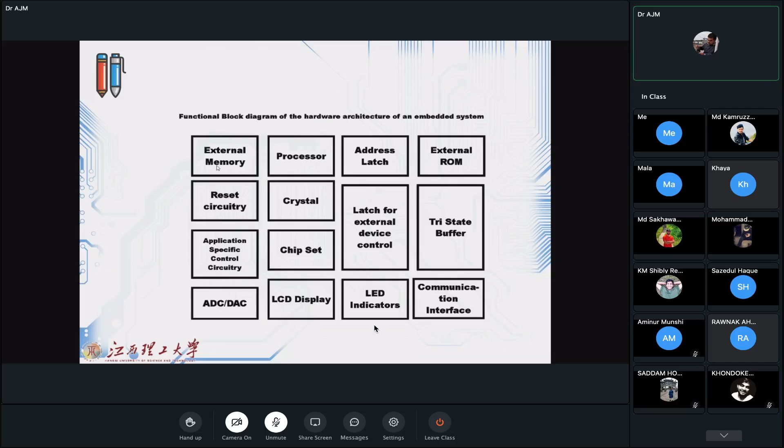Let us review the parts that we have in an embedded system. The first part, if you see the previous picture again, is the processor. What is the role of the processor? Who can tell me? What do you expect from the processor? Please don't read. Let us have a free discussion about our subject. Who can tell me?

So I think the processor takes the data from, let's say, I program the embedded system. So it takes that data, it processes it so that it can be understood by the embedded system, and then translates it and helps the embedded system perform the task. You are right, but just one point is missed. How will the processor understand, how can it conclude?

I think... I'm not sure. That's a good question. Just tell me your idea. I mean, what causes the processor to analyze? Sorry, sir, what did you say? What causes the processor to analyze the data, or in other words, how will the processor analyze the data?

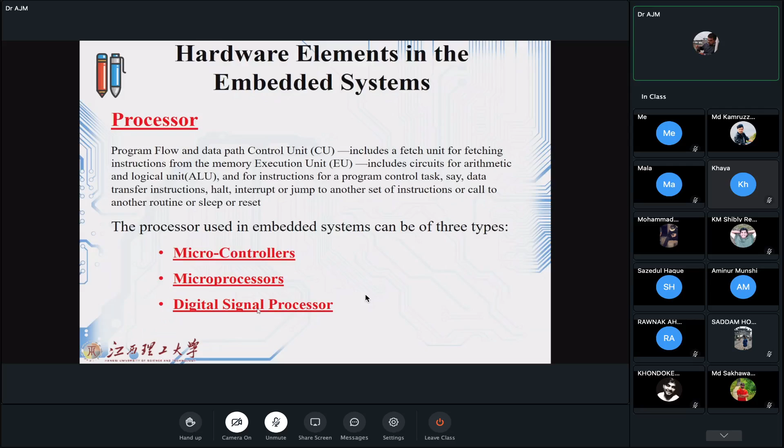The processors used in embedded systems can be categorized in three parts: one could be the microcontroller, one can be the microprocessor, and another can be the digital signal processor or DSP part. Let us review them.

What is a microcontroller? Microcontrollers comprise the main elements of a small computer system on a single chip, and they contain memory, I/O, as well as CPU on the same chip. Here I show something for you: we have CPU, RAM, ROM, and the serial com port. This is the gate from the processor to touch with outside, and also to send or receive something.

And considerably, it will reduce the size, making them ideal for small embedded systems. But it means they are compromised in terms of performance and flexibility. Mainly, the microcontrollers are from the Intel 805X family, something like Motorola 68HCXX. Why do we show it like this?

Because after this, we can have something like 11 or any other model which will come from the company. See this figure: I show some small scale embedded system with 8 to 16-bit microcontroller, medium size with 16-bit microcontroller, and a large size which is about 32. And I name some models.

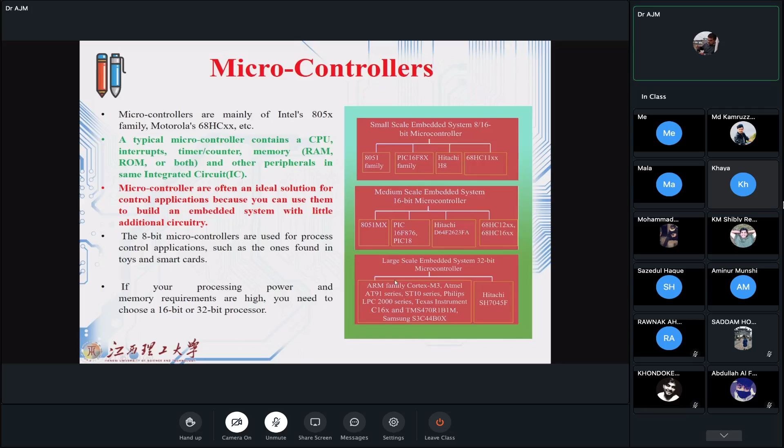But that was the microcontroller. Even we will talk later about it, everything here is packed, it's integrated in one IC. But what about microprocessor? Microprocessor is something like that.

You have one foundation, or you have something like an empty room, but you should go and buy for your room a chair, refrigerator, bedroom, and all. Maybe next lecture I will talk more about this point.

But the main difference between microprocessor and microcontroller is like this: for microcontroller, some amount of RAM, I/O port, timer, and serial COM ports is available. But for microprocessor, you should go and buy it.

I don't know how many of you remember the previous PC that we had 7 years back, suppose Pentium 2 model. When we wanted to buy the computer or PC, we would order the configuration. But what happens nowadays? Nowadays, all configuration, we can say, is fixed, and rarely people order. In some special cases they will do, but in general everything is ready.

You will buy it, you remember or not? Because you used the microprocessor data, and now you are using also again microprocessor. But the thing is that some configuration also becomes fixed for, suppose, new laptops or new computers that you will use.

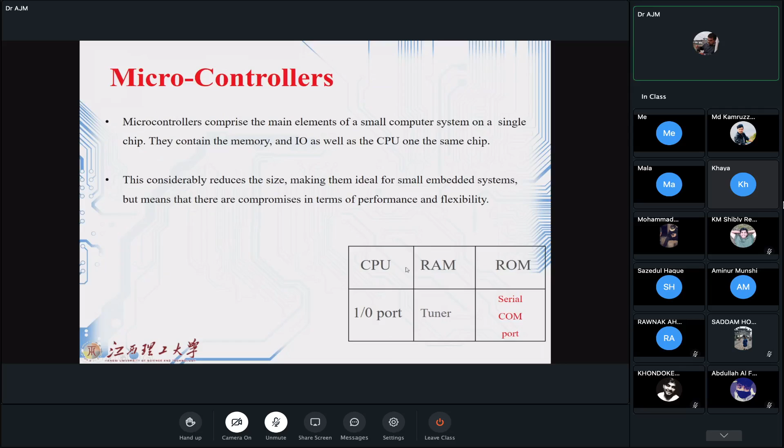Remember this figure and the previous one. Here everything is packed, integrated in one IC, but here you should buy it. This is the main difference between the microprocessor and microcontroller part.

A number of 16-bit and 32-bit microprocessors are available from ARM, Atmel, Motorola, National Semiconductor, and other companies, something like Hitachi, Motorola, and them. In order to develop an embedded system with this processor, you need a great deal of peripheral circuitry. However, microprocessors have higher clock speed and word length, so they are capable of addressing higher memory. These processors are used for high-end applications such as handheld computers and internet access devices.

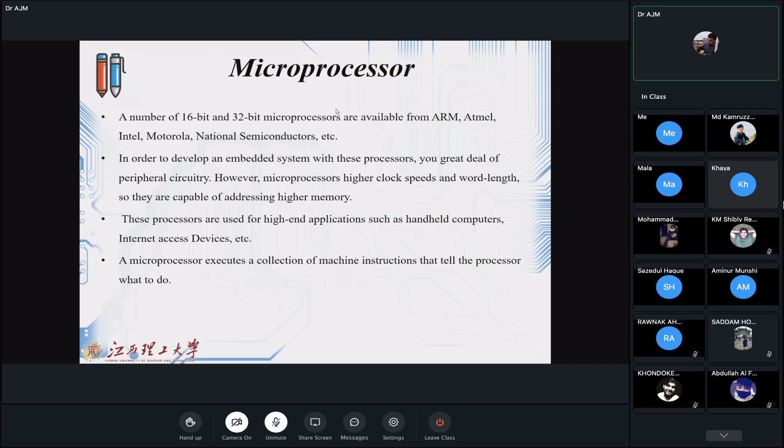Microprocessors execute a collection of machine instructions that tell the processor what to do. See one nice figure which shows the microprocessor's basic concept.

I have CPU, we have some lines to gather the data that we call the data bus, suppose for 16-bit, 32-bit. And this is the address bus, then we need the data bus and control bus. These are the three parts.

You will see that the CPU, memory, and output connect through the data bus to the CPU, meaning the CPU will rule them, the memory and output. See the direction of the arrow? With the data bus, it's something like read and write that you can do with CPU, memory, and output. All of them will share the data, and all of them can be controlled or ruled by the CPU to get the data from memory or get the data from the input-output part.

Here also, suppose we show some external device, with any external device you need one control line and one address line, so that from the CPU it should first read the address and then control it like that. And here from this side, you will see the sensors or transducers, data RAM, instruction program, and boot ROM as the configuration of the microprocessor.

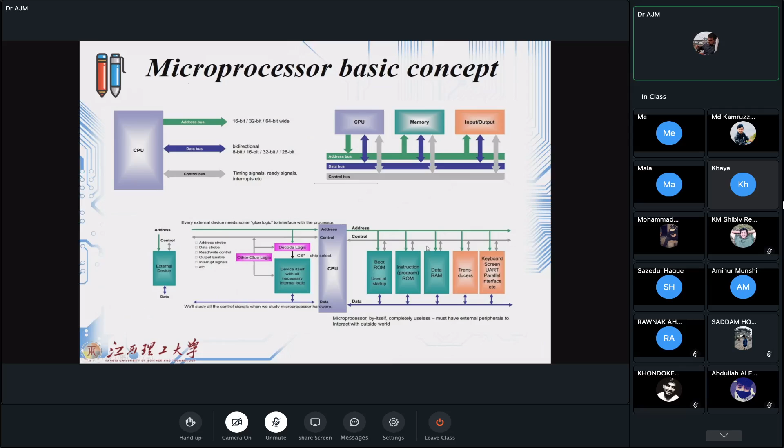Based on the structure, a microprocessor does three basic things. First is using the ALU, or arithmetic logic unit, which allows the microprocessor to perform mathematical operations like addition, subtraction, multiplication, and division. Some modern microprocessors contain complex floating point processors that can perform extremely sophisticated or difficult operations on large floating point numbers also.

Microprocessors can move data from one memory location to another, and also a microprocessor can make a decision and jump to a new set of instructions based on that decision.

From GPP, we can say GPP proper is for general purpose applications, and microcontrollers are for industrial applications. For DSP, that is digital signal processor - these are programmable microprocessors for extensive numerical real-time computation. ASIC is application specific integrated circuit, this is the short form. Mainly they handle algorithm complexity and are implemented in hardware.

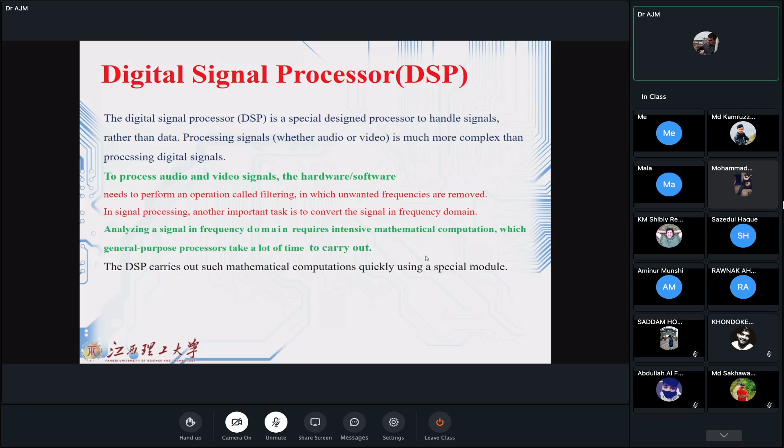That is why we should use the DSP part, and DSP carries out such mathematical and complex parts very easily. Here I bring one figure about the DSP part.

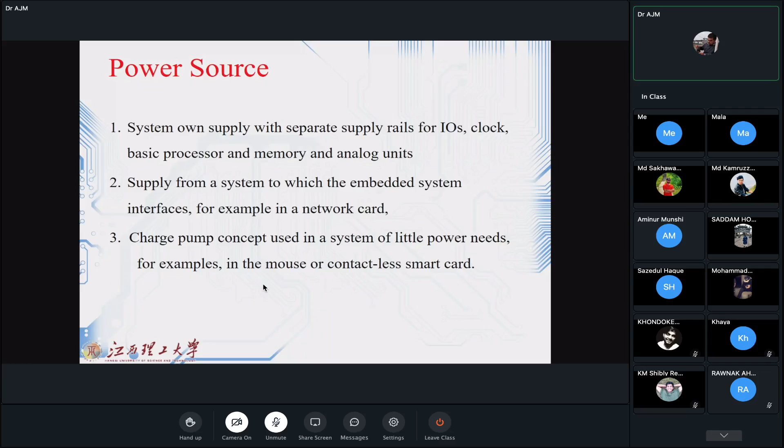The next block is the power source. Any system needs some power to work, and the system is supplied with separate supply rails for IOs, clock, basic processor, memory and analog units. Supply can come from a system to which the embedded system interfaces, for example, in a network card. The charge pump concept is used in a system of little power needs, for example, in a mouse or contactless smart card.

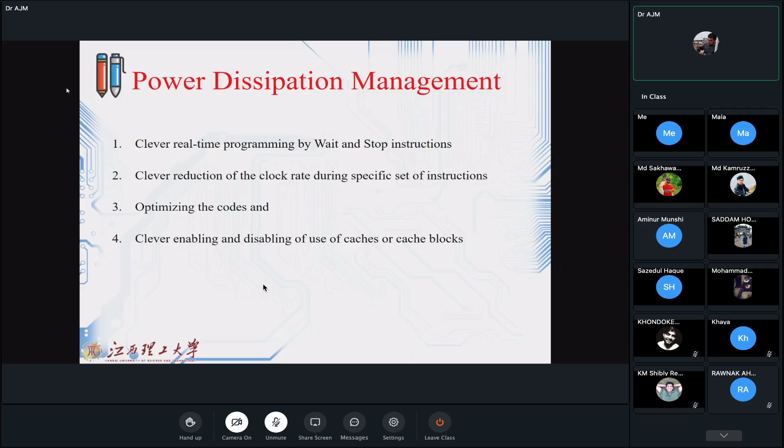Something that we should know in embedded systems, with a very critical role, is the power dissipation management part: real-time programming by wait and stop instructions. We need some clever methods for that: clever reduction of clock rate during a specific set of instructions, optimizing the code, and clever enabling and disabling of use of cache or cache blocks for our embedded system.

The other block, if you remember the first figure that I showed you, is the crystal part, since the CPU needs some clock source. A crystal oscillator will generate the clock for us. The crystal is chosen based on the clock frequency of the processor, and microcontrollers provide it on-chip. But for the microprocessor, you should go and buy a separate crystal for the system. Clock generation circuitry determines the various states of machine signals. We will mainly talk about this machine cycle in the assembly course, how it will act and how it's going to help with programming.

One of the critical parts of any embedded system is the reset circuit. Reset circuits are generally cheap, but they have the main and critical job in any system. Why? Because with them, you can restart and maybe rerun your system. It's generally built in hardware to take care of any unforeseen problem. Sometimes the program does not move, it just stops.

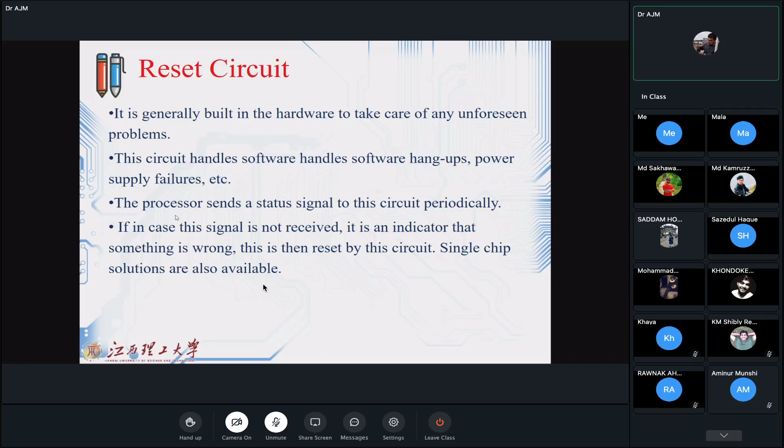You know, any system needs something to watch and see whether the system is working or not. Something like a security system we have in our embedded system, and we call it the watchdog timer. The watchdog timer is something like that. It will check if my program jumps into a loop and is not moving, and it comes and restarts the engine. Okay. Most embedded systems have no provision for resetting the processor. In such a case, a watchdog timer is used.

It's set to a large value and it counts down. It means something like this: it knows that up to the end, my process will take, suppose, some amount of time. If it goes beyond that time, with some ratio or some up and down number, it's going to reset the system or the whole process from the start. And then the process will start again.

When the value reaches zero, the processor resets. And if things are fine, there's no need to reset the processor. The processor resets the watchdog timer to that large value again. We will see this nice part in the Arduino part that we have.

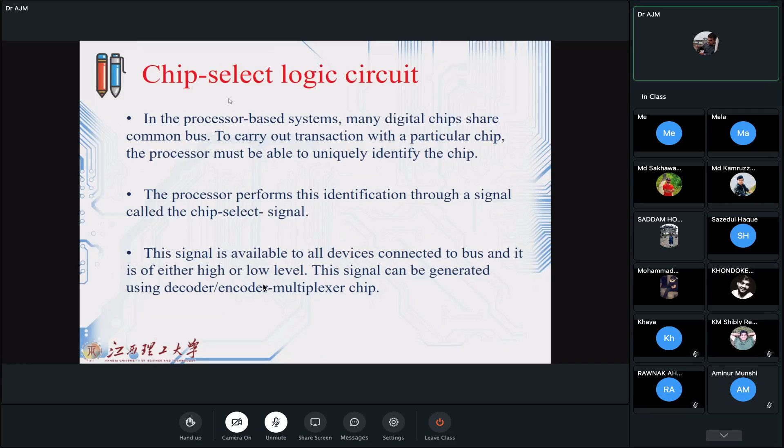This signal can be generated using decoder, encoder, multiplexer chips, and so on. If you remember, in the DSD lecture, in the decoder and encoder part, we had some lines which give the commands, or act as the handle to select which input should come and which should not come. Okay, one of the nice parts of embedded systems is ADC and DAC.

What are they? Really, when we want to work with systems, what we should do is acquire some analog data. Just hold on. I will come back.

What will happen? If you really want to work with systems, you should acquire some analog data and work with it. I mean, suppose you want to work with sensors in the real world, you interface with analog data and real data. This is the job of the ADC part. And on the other side, sometimes you need to generate some analog data with the digital system, and we call that DAC. So in embedded systems, we use these two parts to sometimes generate signals or sometimes acquire data. That is why we call it ADC and DAC.

Something I should tell you is that the cost of the embedded system is mainly related to these two parts, I mean the ADC and DAC part. And when you want to select or design any embedded system, you should take care of it. Please see this figure, just 1 minute. I will continue. Just see this figure.

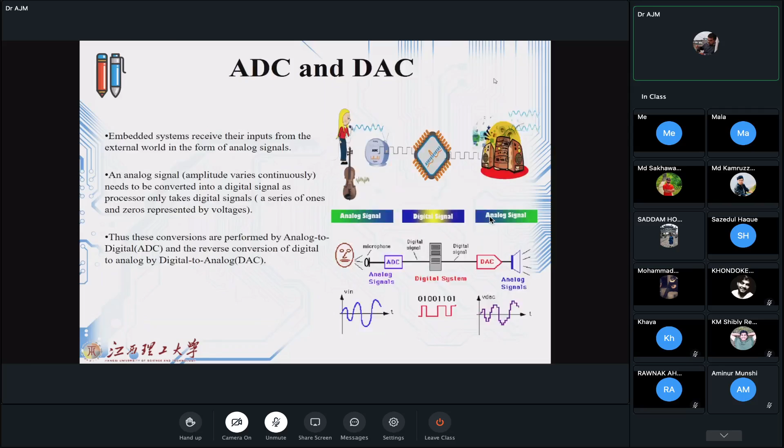The next point that we should see is the application-specific control circuitry. Since we are dealing with the embedded system, which can be application specific, such circuits are needed which can handle some specific application. Some devices like relays, keyboards, functional keypads, transducers or sensors need some specific control circuits that can handle and interact with these specific application jobs. To control all these devices, one needs circuitries to interface with the processor.

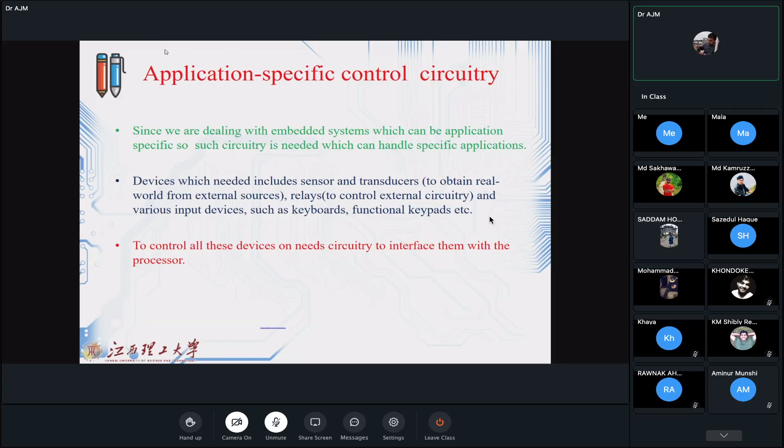Let's go on to see one of the most important parts in our embedded system, which we call I/O. I/O are input and output. As the output part, which we call the display unit, we can have various types of display, something like LCD, or liquid crystal display, which we will work with on the Arduino later in this course. They can vary in type, something like two-line or with different types of characters. We will read more about this type.

Or there can be something like LEDs, which can show different colors, I mean the light-emitting parts. Or there can be a patch of LEDs that we call a seven segment, and we studied that in DSD. We are going to use them later in the Arduino part of our embedded system.

The next I/O part can be the keypads. Each embedded system offers different capabilities for providing user inputs, and handheld computers are provided with either full-fledged keyboards or a form of handwriting recognition, depending on the need, which can vary from a few keys to full-fledged keyboards.

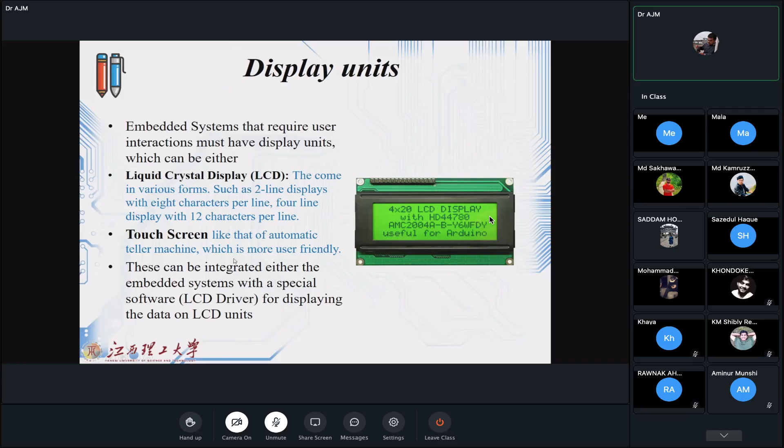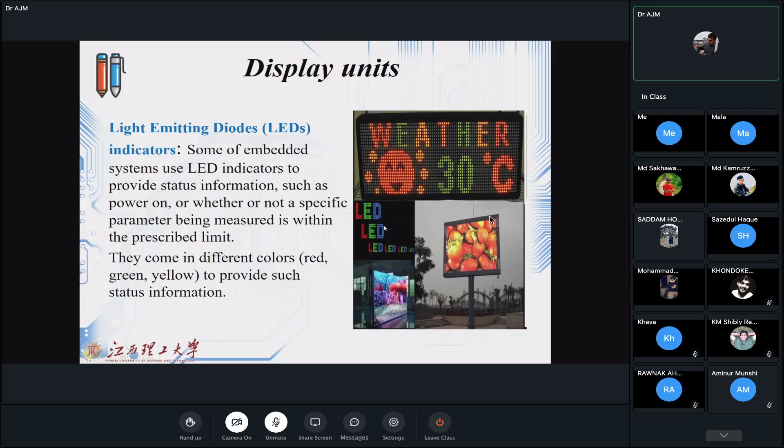As I said, for the display part, we can have LCD, something like that. We can have some touch screens, like the automatic teller machine, which is more user-friendly nowadays. And maybe we can have some LED forms like these, or a big LED like the TV that we have, or something like that as I brought for you. These are the display units that we can assume.

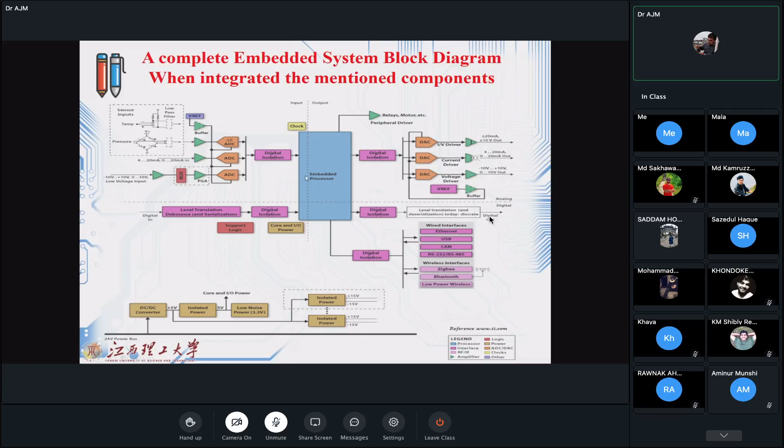Here the memory is not shown. I cannot see the memory. Here I can see the communication part. DAC and ADC are there. What I cannot see is the memory part; maybe it is hidden inside this embedded processor. But the whole system can be like this. And we just finished the embedded processor, just some blocks inside.

But really, the big challenges we have when we are going to design an embedded system are the points that I mentioned here for you. The amount and type of hardware that we need is one of the big challenges in embedded systems, because it affects the total cost of your designed system.

Then you should use optimizing of the microprocessor, something like ASICs and single purpose processors in the system, optimizing according to the performance, power dissipation, cost, and other design metrics. Optimizing hardware, taking into account the design metrics, for example power dissipation, physical size, number of gates, and engineering, prototype development, and manufacturing costs. These are all big challenges in embedded systems. When we start the Arduino part, I will talk more about this challenge.

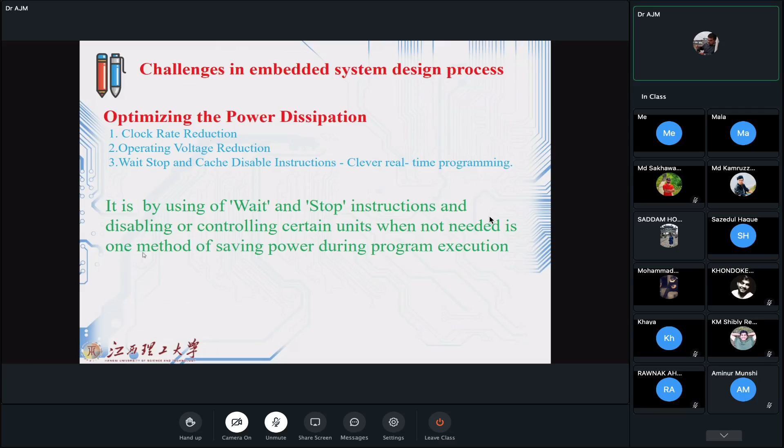Suppose optimizing the power dissipation: you should think about clock rate reduction, operating voltage reduction, and wait, stop, and cache disable instructions. Using wait and stop instructions and disabling or controlling certain units when not needed is one method of saving power during execution. Disabling use of certain structural units will reduce the power dissipation, as well as process deadline, flexibility, upgradability, and readability of the embedded system that we have.

Okay, let's once more see the inside of our embedded processor. We have input devices, power supply, reset, oscillator. We have processor, timer, interrupt controller, which we will talk about, parallel ports, serial communication, program memory and data memory, system application specific circuits, and output interfacing driver circuits. These blocks are hardware elements that should be in any embedded system.

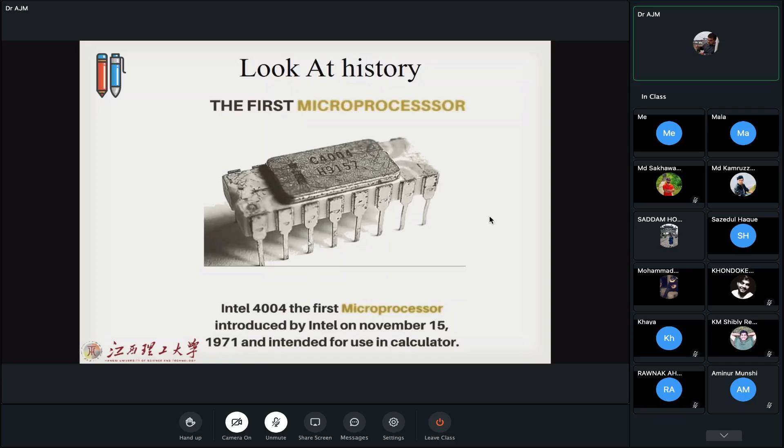Okay. As a second task, I want you again to find some embedded system around yourself and list its internal parts. Another thing is that I want you to write about 5G and its role in embedded system design, because it's not yet in any university's lecture, but I'm sure the future of embedded systems will be affected by 5G. And as we are in China, the leader of 5G, we should think about this concept, I mean the 5G role and application. A person who provides a good introduction to 5G and also explains its role in embedded system design will get good marks.

And maybe next week, at this time, I will ask him to take around 10 minutes to discuss his work and the role of 5G. I think 10 minutes is okay for us to just know about 5G. It means that I want you to do a proper search about 5G and its role in the future of the world and embedded systems.

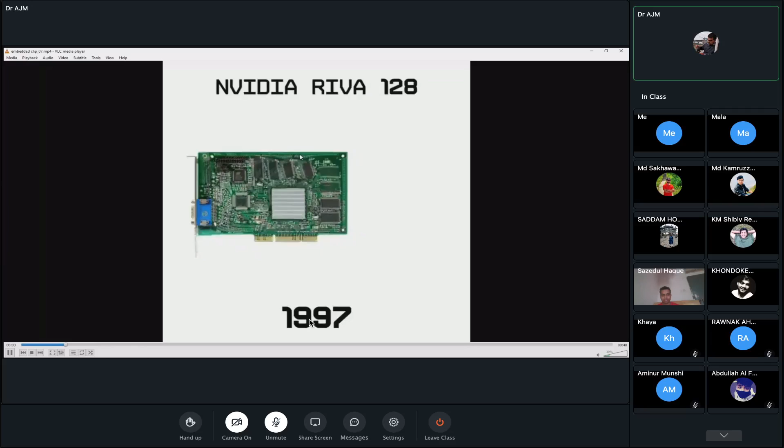Please turn it off. Let us see some nice clips. The first is from the history of the development of some processors. Let us see. See the date. I will start from 1997, NVIDIA RIVA, and the point I want you to see: just see the size and type of the communication, which initially was ISA, then went to PCI mode, and now it's going to the USB format.

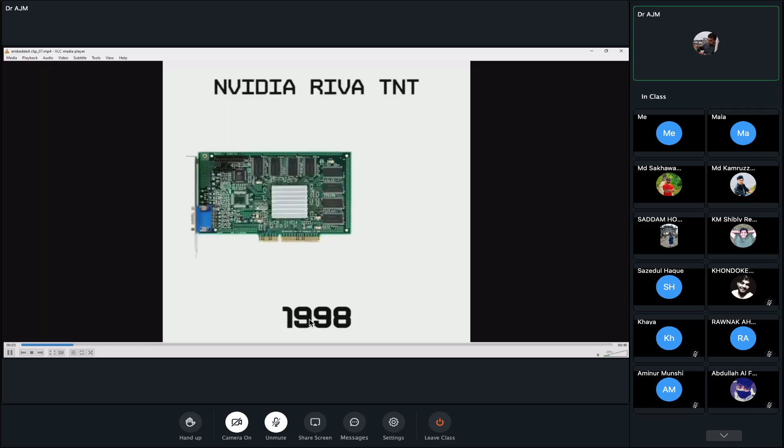These things you didn't see, but they are very old, in the old computers. I don't know if you opened your old desktop. If you open it, there were some slots there. Mainly there was the ISA port. That was the name of this port. After that, the PCI ports came into the picture. After that, PCI went and USB 1 came into the picture for communication. See how the size and the number of chips slowly change.

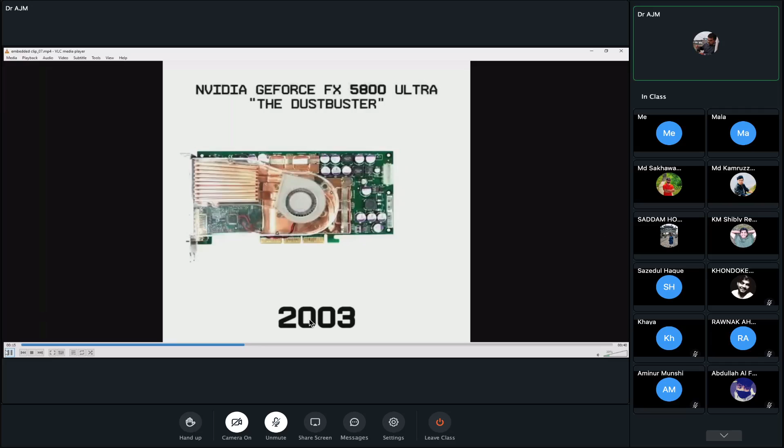This is year 2003, that is 21 years back. And see, as the number of chips increased, what will happen? Because heat dissipation was a great problem, for this specific GeForce graphics card they started to use a fan to manage the heating of the card. See what is going to be done. Nowadays, this part is mandatory for all graphics cards. See.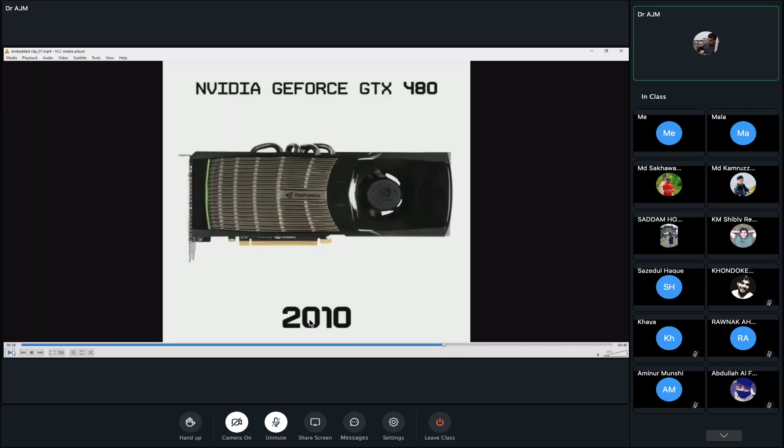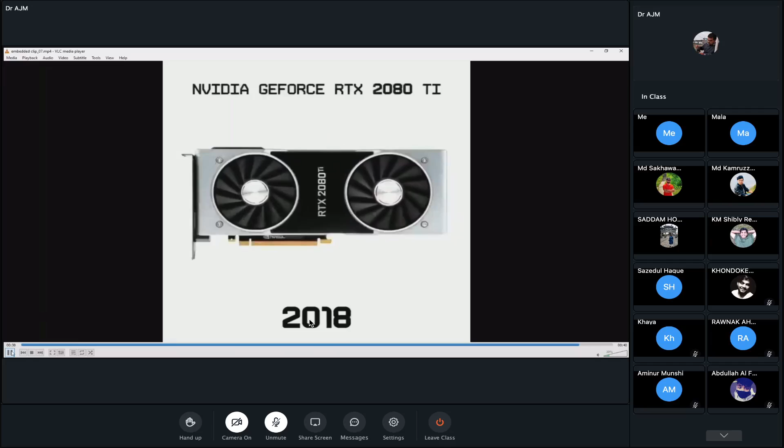In 2010, you can see that the shape, design, and heatsink part is finished—it's changed. Yes, that was till 2018. Unfortunately, I didn't have the whole generation. A friend of mine from NVIDIA sent me this, and I like it because if you compare from the first day, suppose 1991, to 2018, you will see the total concept of communication and the design has changed.

Let us see one. I don't know, can you see this? Still can't see anything, sir. Okay, see.

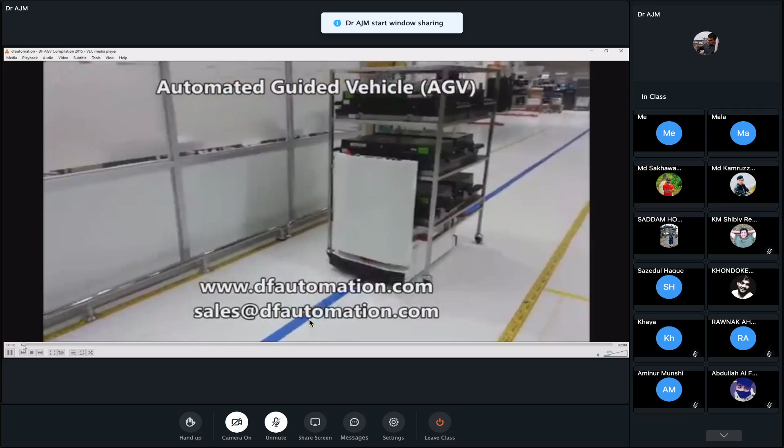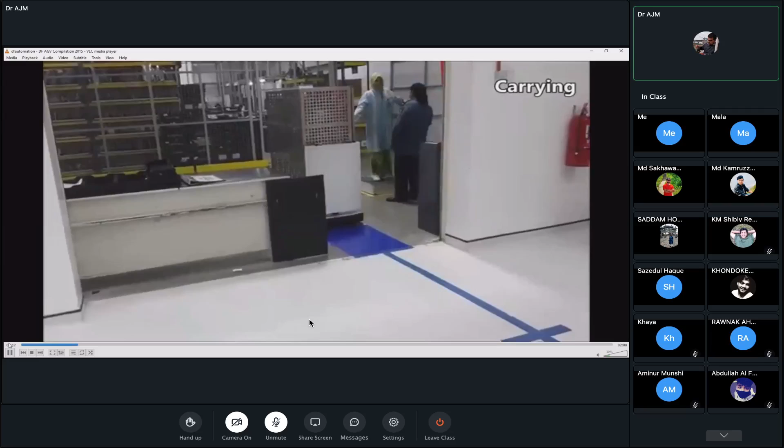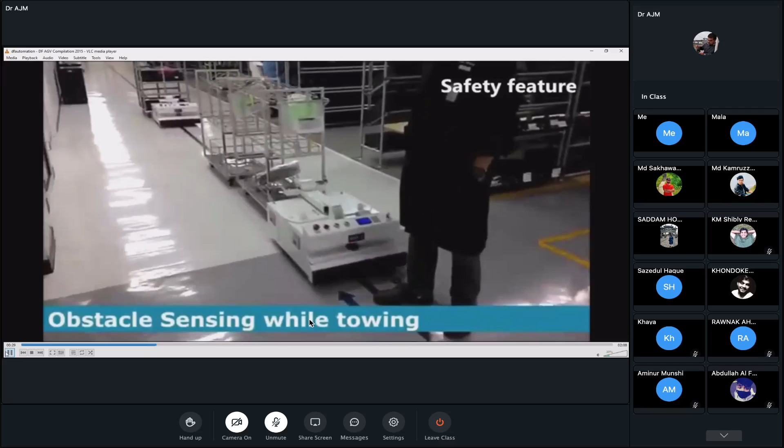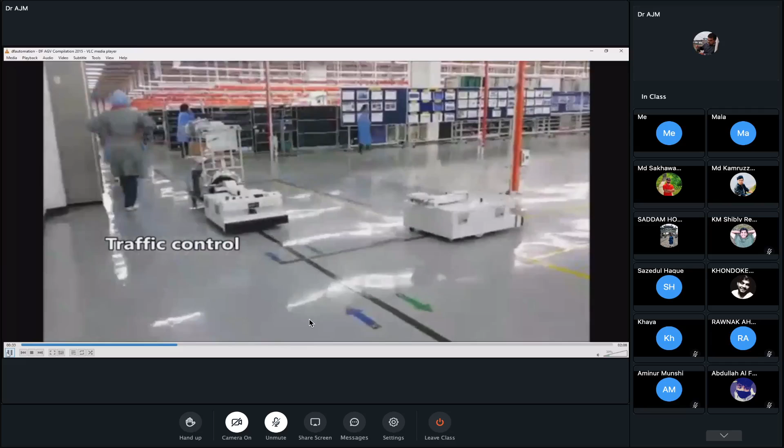This is also one type of robot, but we will see it as an embedded system, which is going to follow this line and be useful in industries to carry loads. This embedded system has one LCD which you can easily program based on your task. There are some sensors as inputs, like the obstacle sensing part, which acquires the ADC part to decide when to stop or work, and they can manage movement when they follow the path.

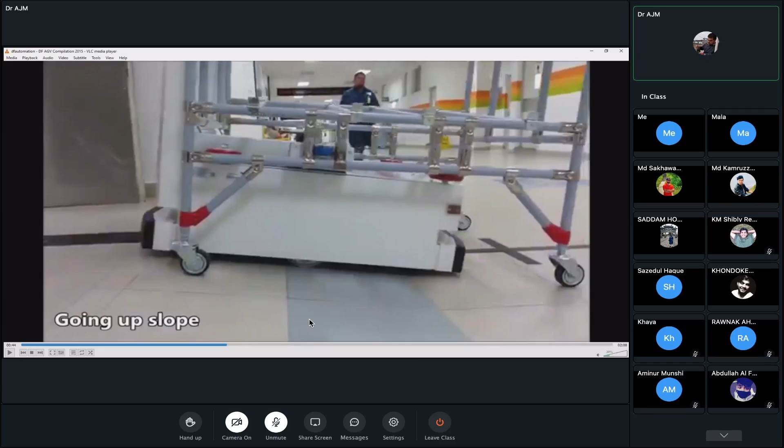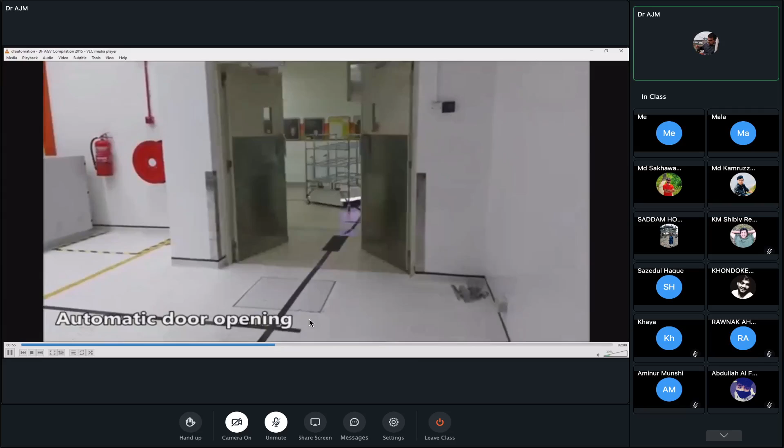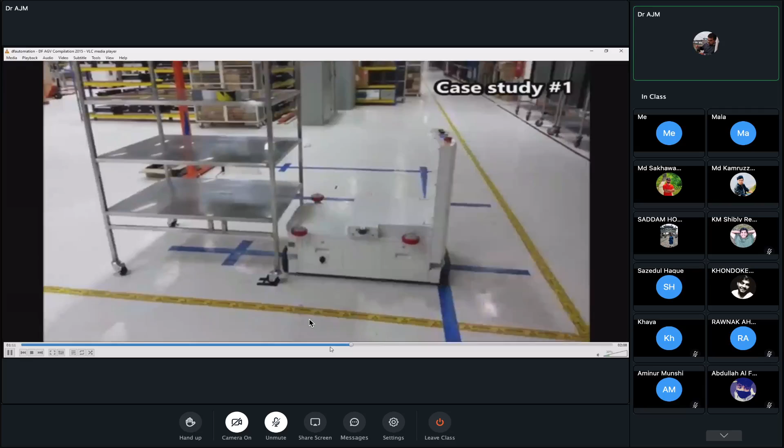What will happen here? Again the ADC comes into the picture. They can sense the different degree or slope, and based on that feedback, they can adjust the speed of the motor. Then they can send a signal to open and close a door like this, and even use a lift, and then auto-charge, as the main part of any embedded system is the power supply.

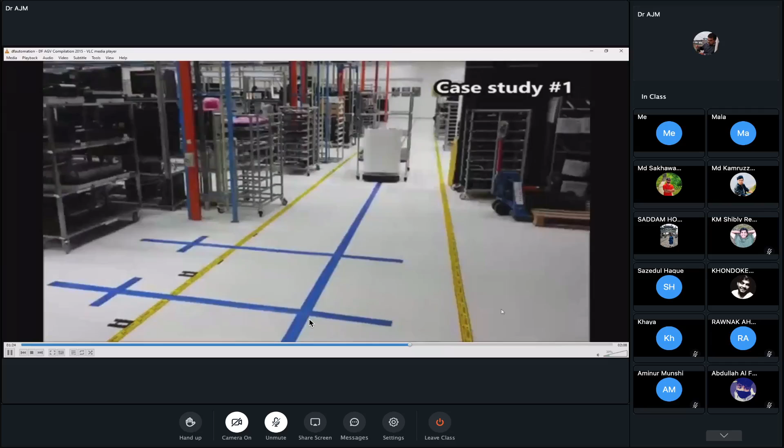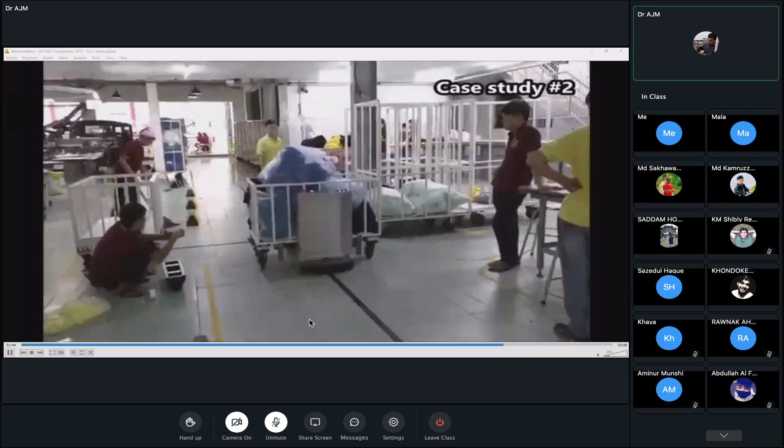Why am I showing you this? Because I don't want you to limit yourself to embedded systems as only microcontrollers. I want you to know there are various types of embedded systems, and don't limit yourself even to the robot part.

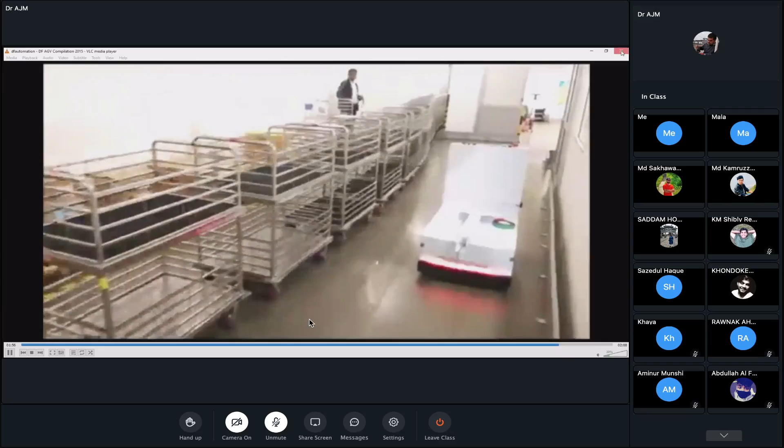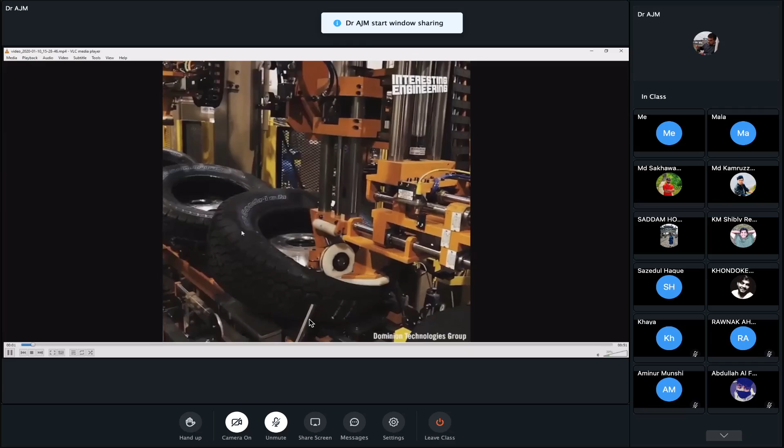Okay, let me show you other things. I think I should reshare my screen with you. This also can be one embedded system for us—this is a robotic system that can be used for tire jobs.

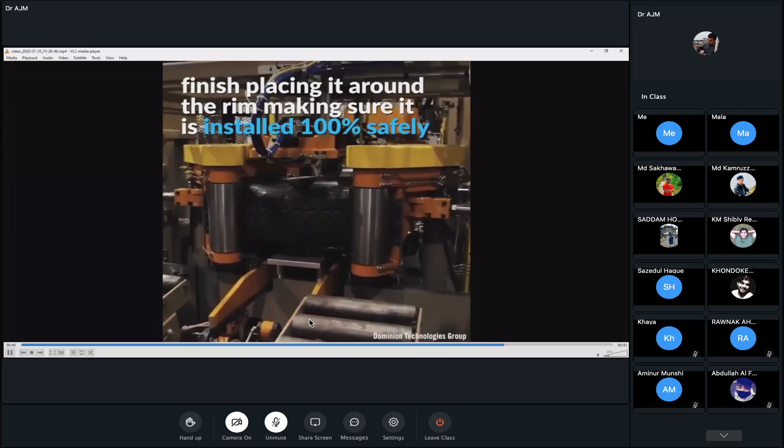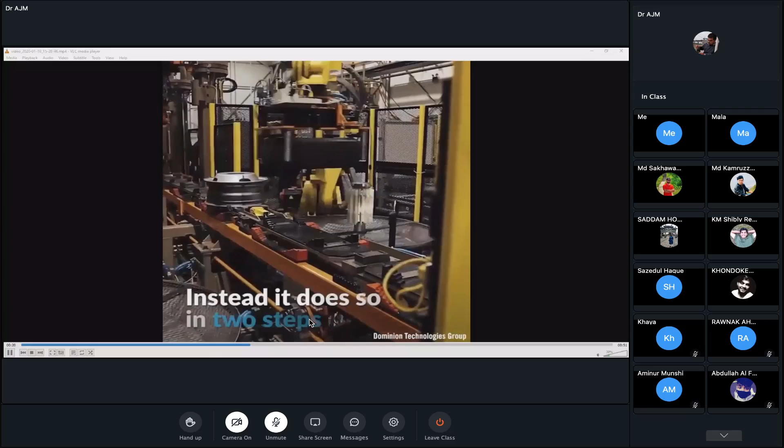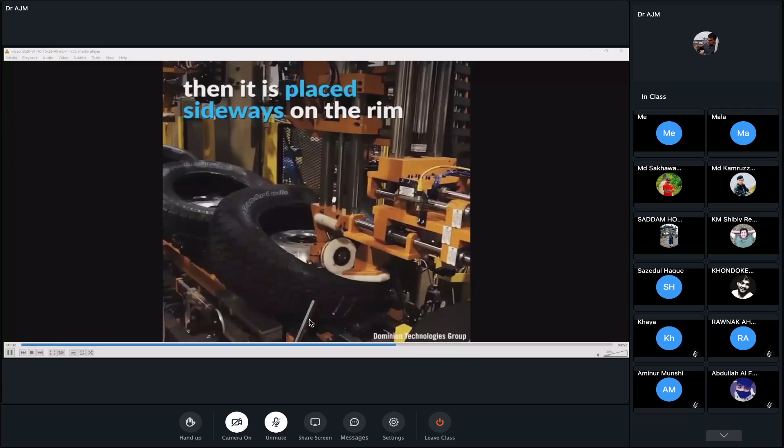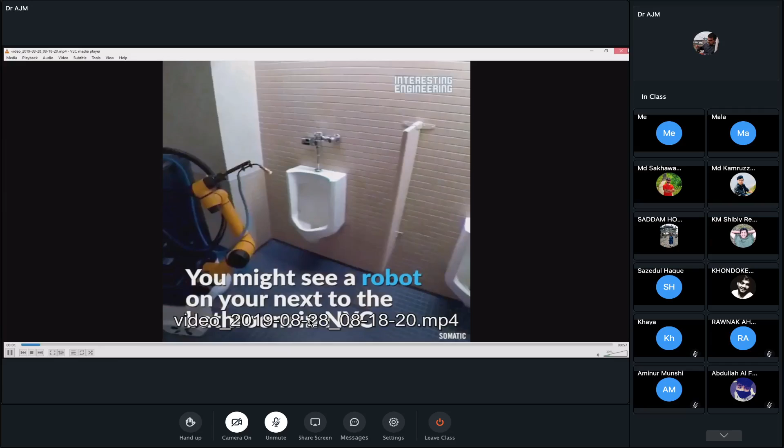Let us see once more—see the assembly of the tire. And the last thing I'm going to show you, I think you saw this.